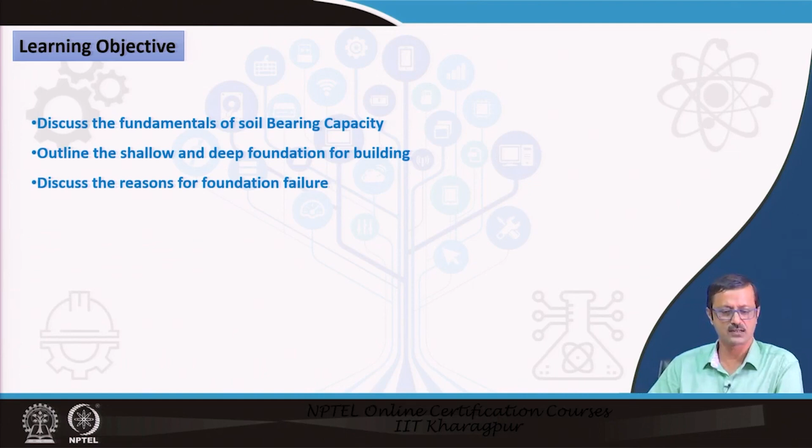So in that we will introduce the topic, and then we will discuss the soil bearing capacity, then the types of foundation - shallow foundation, deep foundation - and the reasons for foundation failure. The learning objective: we will discuss the fundamentals of soil bearing capacity, outline the shallow and deep foundation, and discuss foundation failure.

Actually it is a very vast topic, this particular foundations and soil mechanics, and it requires a rigorous kind of expertise to deal with. It is not only the structural engineers, geotechnical engineers actually deal with this. We will have to cover it in half an hour time, quickly, because we need to know some glimpse of it. It is a specialized field in civil engineering and building which deals with the building foundation.

And if you see the building foundation, it has two separate parts or areas of study. One is called soil mechanics and another one is called foundation engineering. Soil mechanics deals with the properties and parameters of the soil.

So if you take a soil, it is actually a three layered system you may say sometimes - it has some solid, it has some air, and it also has some water in it. A three phase system we usually call it. So based on the proportional amount of the solid, the air voids, and also the water, its properties change.

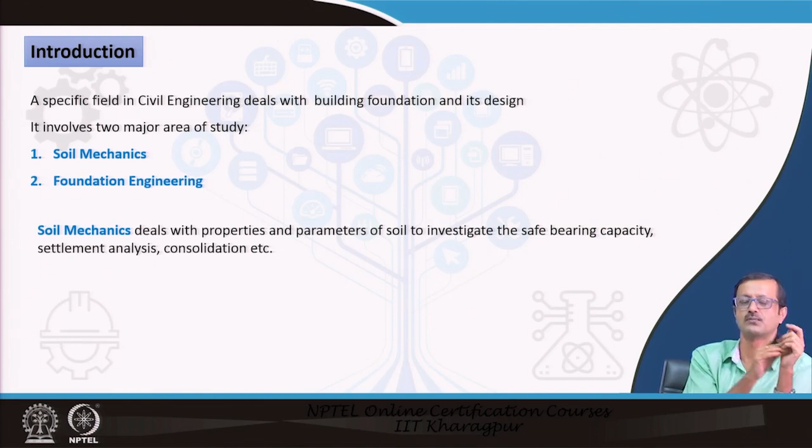So you require to investigate the soil to find out how much is the load carrying capacity, and how much the soil can further go for some kind of settlement if there is some load on it, or sometimes it is consolidated for a longer period of time, how much. So those are the typical outcomes which people want to know before they go for any kind of foundation system, and that is covered in soil mechanics.

And then comes the foundation engineering. Foundation engineering deals with the different types of foundation systems for the building and structure, their applicability, their construction, and the design mechanism.

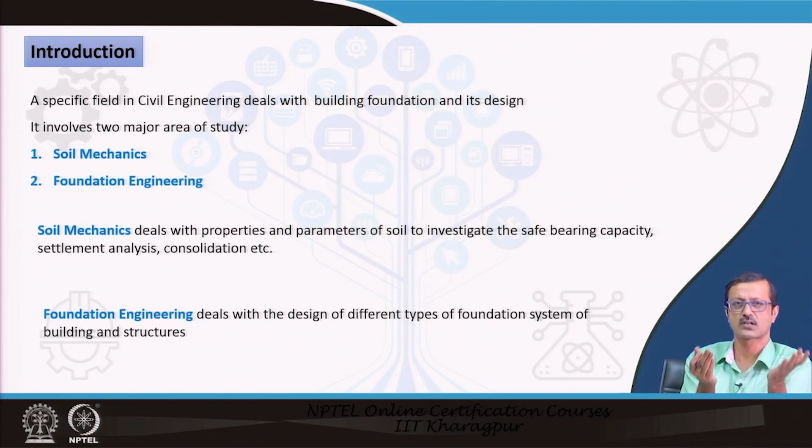So finally we boil down to the soil bearing capacity, whatever you taught in a particular soil mechanics. There are a lot of other things also, but mostly the primary target is to finally find out how much is the bearing capacity. And what is bearing capacity? The bearing capacity is the capacity of a particular soil to support any imposed load. How much it can maximum take has to be finally found out from those properties and parameters.

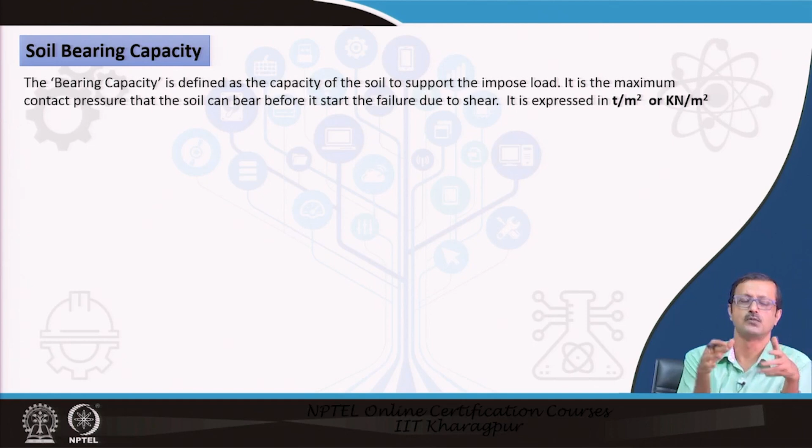And if you put more load - so I have some illustration. Suppose it is a soil and there is a foundation, and there are some column or some kind of wall, from where you can give some kind of load. So if there is imposed load, there will be some kind of contact pressure which will be opposite in direction - following Newton's third law, any action has equal and opposite reaction.

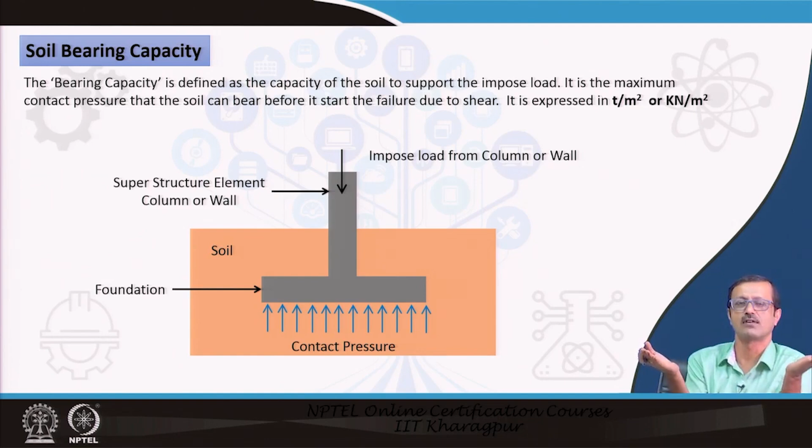So the contact pressure - now if you increase the load, suppose it is a very high amount of load, or you are not increasing the area of the foundation, the contact pressure will increase. And finally it will give you some kind of failure - shear failure, cracks will appear below the soil, and your foundation may settle down or maybe tilt, or those kinds of problems will be there.

We have to not load the soil till it fails due to shear. So you have to finally find out how much is the carrying capacity, either in ton per meter square or kilonewton per meter square. These two are the popular units for soil bearing capacity.

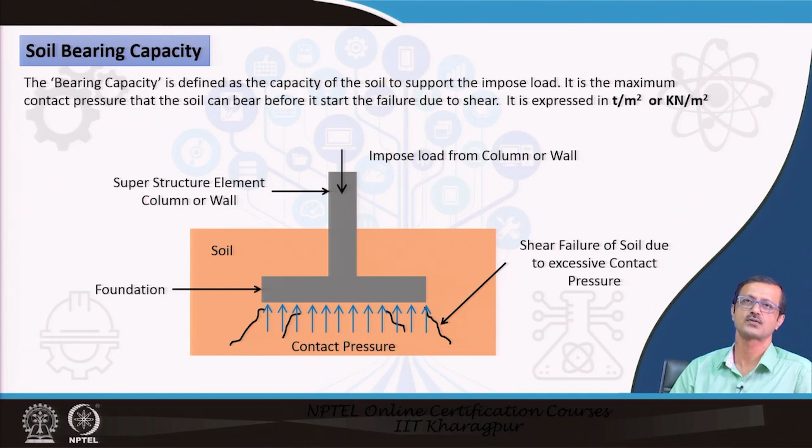So the geotechnical engineers do soil investigations for this purpose. There are a lot of ways - some laboratory tests, some in situ tests. They can do those and finally tell you that this much ton per meter square is the soil bearing capacity. So what are the factors that affect the bearing capacity?

If you see, the type of soil and its properties is one of the factors. There are basically two types of soil. One is called clay, the cohesive kind of soil, which has some kind of adhesion - one particle of clay and another particle of clay are attached with each other like a gum or glue. So it is adhesion.

Another type of soil is sand, which is non-cohesive, not having that kind of attachment or adhesivity, but having some friction with each other. If you want to move one particle of sand over another, you have to overcome that friction. Some soils have both varieties, called C-phi kind of soil, where C is the cohesion factor and phi is the angle of friction. These two properties have to be found out from testing, and from that you can predict the bearing capacity of the soil.

That is one of the important parameters of soil properties required to find the bearing capacity. Then the depth of water table at your site where the building is to be constructed - you need to know the depth of the water table, how much water can come and till how much. This is very important because sometimes it is saturated, sometimes oversaturated, sometimes fully dry. Because of that variation of moisture in the pores, the soil's bearing capacity character will change.

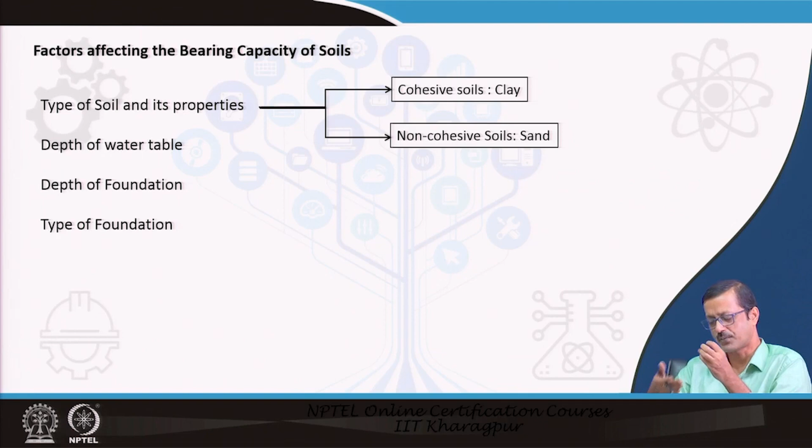You also require this understanding before you jump into bearing capacity: how much is the depth of your foundation. As the depth of foundation increases, you have to see at that particular depth how much is the capacity, not at any other point. Also you need to know the type of foundation - whether it is deep foundation or shallow foundation, or which type of foundation - that also has to be known to you.

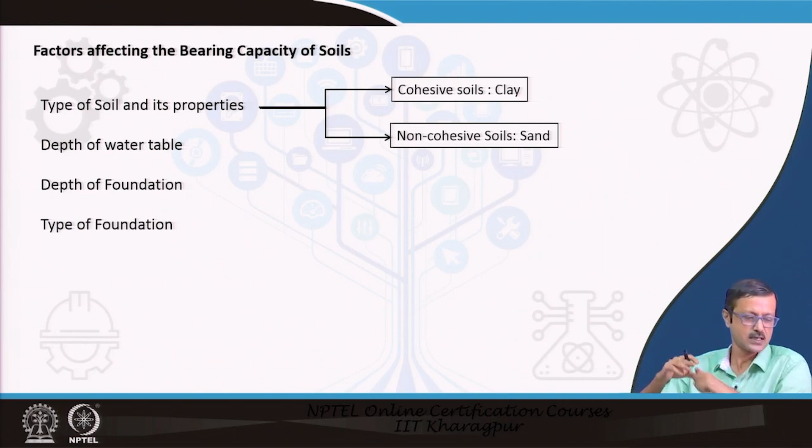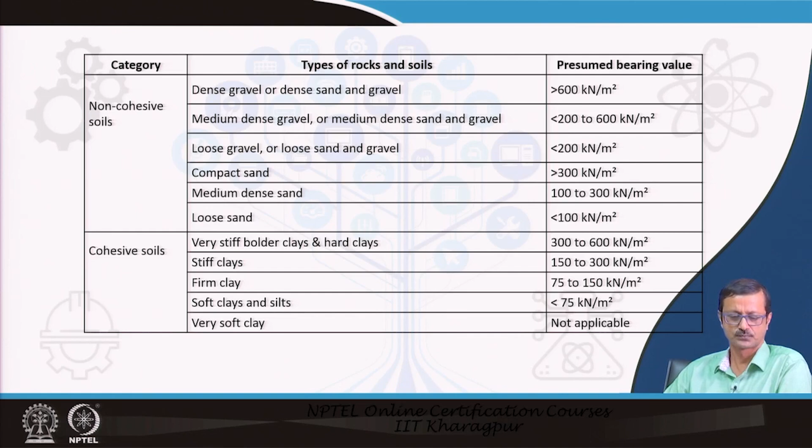So this is one table that gives you some idea about what should be the bearing capacity of the soil. Non-cohesive soil, that is sand or gravels, in the first part of this table, has a very good bearing capacity. But cohesive soil, which is clay, is gradually down - there are some soft clays marked as not applicable, where you have to improve or remove the soil, or use a different type of foundation like pile foundations for those kinds of soil.

Now, the type of foundation. We probably understand what bearing capacities are now, so let us see how the foundation can be designed. In foundation design, there are basically two types of foundation, or you can initially categorize two types: one is called shallow foundation and another is called deep foundation. These two foundations are classified based on the depth of the foundation and the width of the foundation. So if I draw a foundation, suppose this is the foundation, with this being the ground.

So this is the width of the foundation and this is the depth from the ground. This D and B will play a role. So if the D is less with the width of the foundation, then it is a shallow foundation, and if D is very high with respect to B, then it is a deep foundation. We call it a deep foundation.

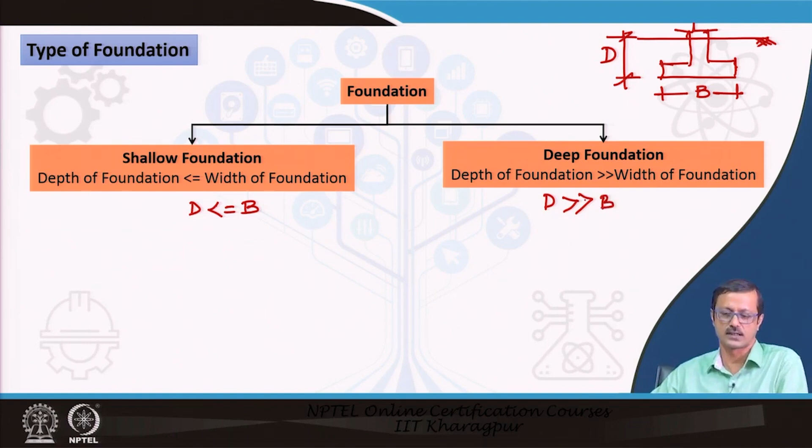So the shallow foundations are the wall footing, isolated column footing, or maybe the combined footing. There are various types of combined footings also, like rectangular footing, strap footing, grid footing, and raft foundations.

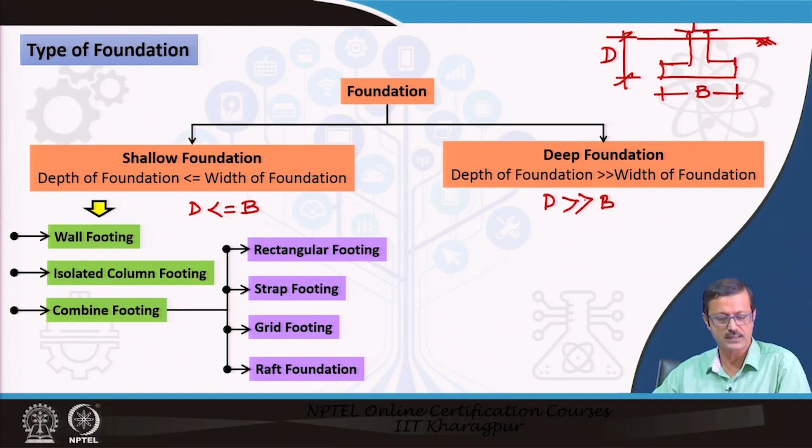So those we will discuss now, and the deep foundations are of 3 or 4 types, but this one is very important for our use, the pile foundation. Pile foundations are used mostly for buildings, and of course for bridges also they can use, but well foundations, pier foundations, are very much used not for buildings, but for other structures like railway bridges or any bridge in the water, in the river and all.

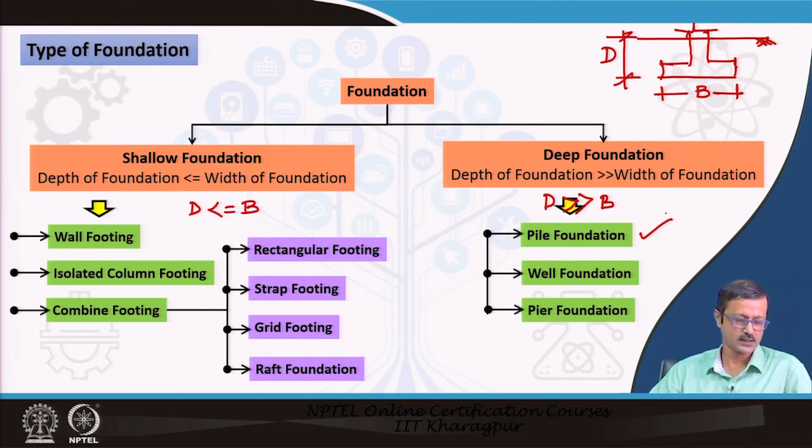Now in the shallow foundation, let us start with the isolated footing. Suppose there is a column which can take a load, and this load has to be taken to the foundation. So we are going to spread the legs of the foundation. It is something like your leg - the load of the whole human body is actually spread by the feet. So you need to increase the contact area such that it distributes the load in the soil within the zone of the soil bearing capacity.

So the single foundation is dedicated to a single column. If that is so, it is called an isolated foundation. It can be square or rectangular shaped, sometimes circular also. The area of the foundation should be such that the load is safely distributed over the soil.

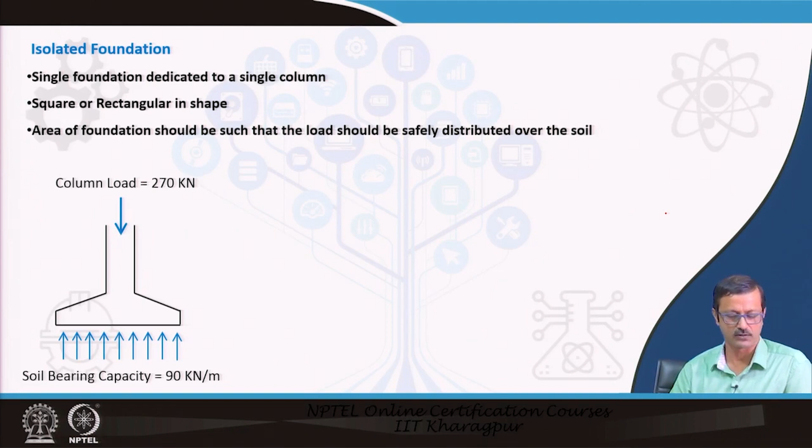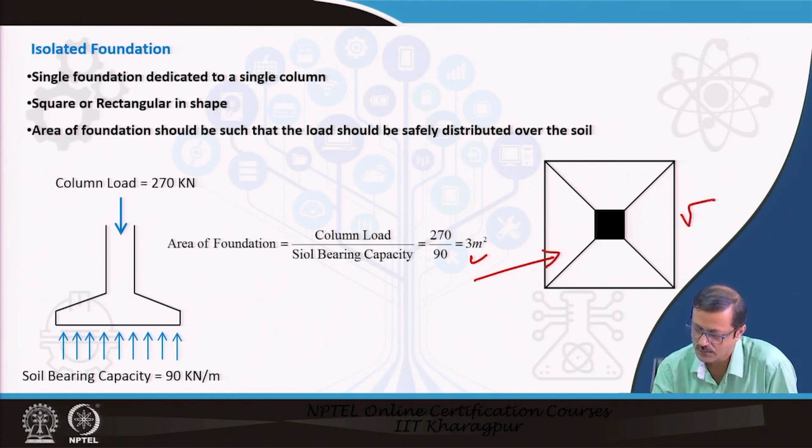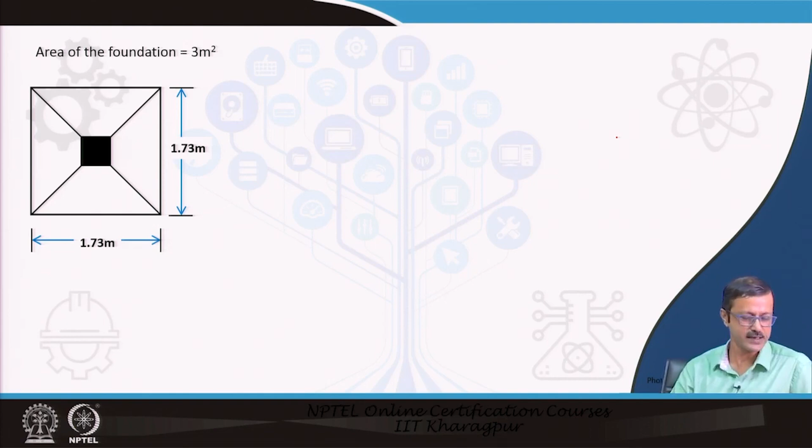Suppose I take an example where the column is taking 270 kilonewton load and the soil bearing capacity is 90 kilonewton per meter. So I can easily say that the area of the foundation should be the column load divided by the soil bearing capacity. So here it is 3 meter square. So this has to be 3 meter square, and if it is a square, it should be root 3 by root 3, something like that - so 1.73 meter by 1.73 meter on both sides.

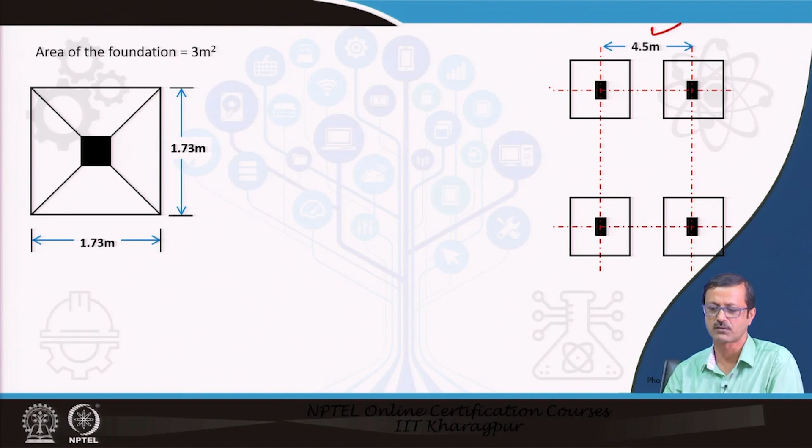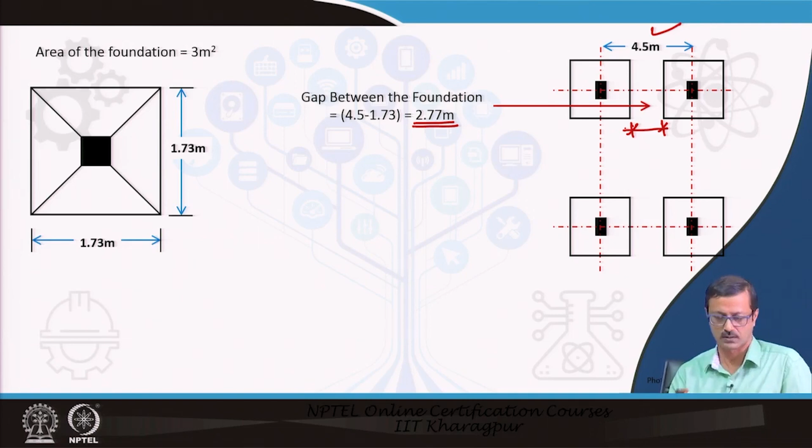Suppose you have a column layout in your building such that each column is taking 270 kilonewton and the distance between column to column is 4.5 meters. So you put your foundation of 1.73 meter by 1.73 meter, and you will find there is still a gap between these two, about 2.7 - so this is your 2.77 meter or so. So like that, our isolated foundation can work or be placed in a particular structure. So those are the isolated foundations, also called pad foundations sometimes.

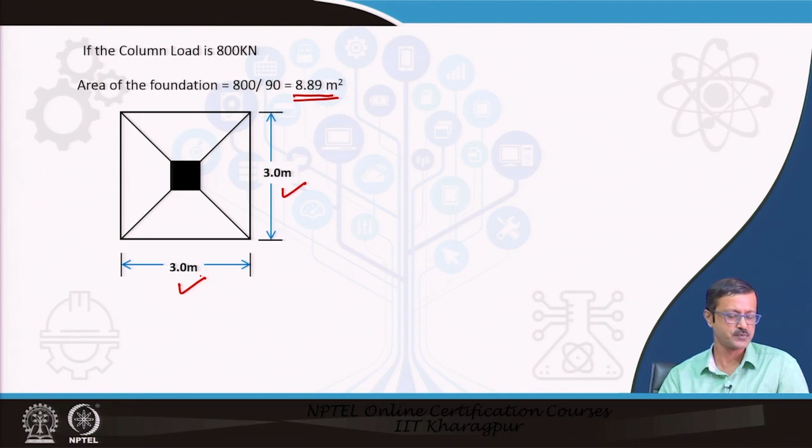Suppose I have increased the column load - instead of 270, now it is 800 kilonewton. So the foundation area now increases to almost 9 meter square. So I kept it 3 meter by 3 meter, which gives me a square isolated foundation of 9.

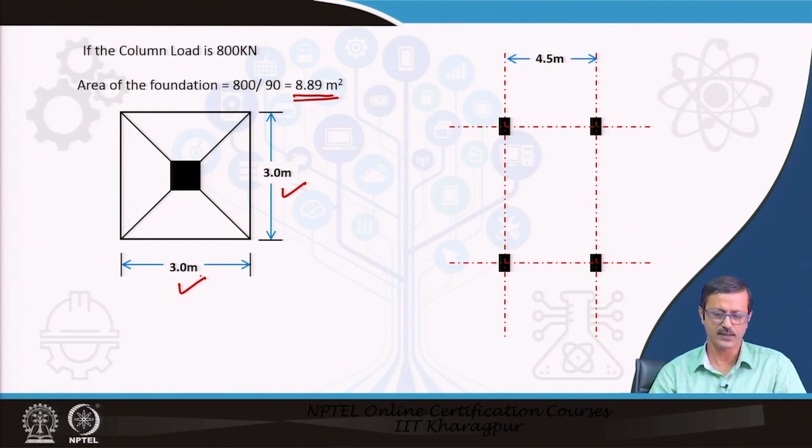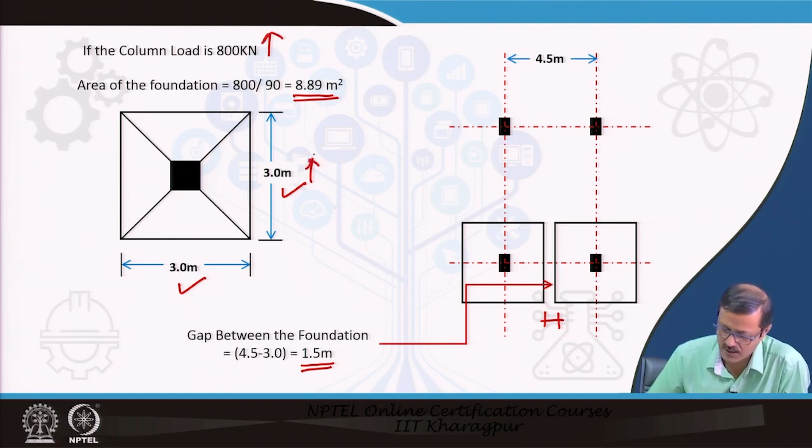Now if I have the same module with me, that is 4.5 by 4.5 is the grid size, so if I place this 3 meter foundation, the gap is now 1.5 meter. Sometimes it is furthermore close, because if the loading is much higher, this dimension also goes higher, so the gap becomes less. So if you further increase it, sometimes it may happen that the gaps become too narrow, or sometimes the foundations may even overlap.

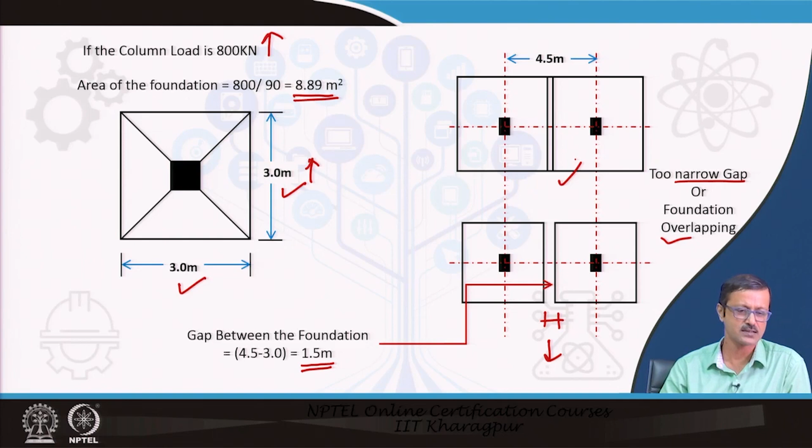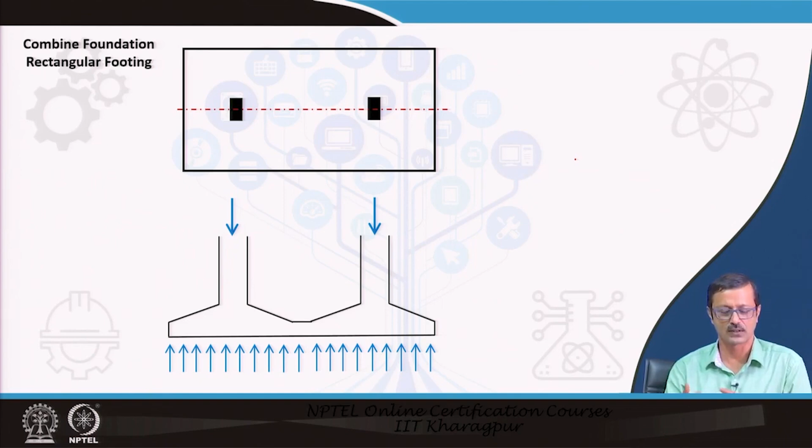This is an overlapping case, so the foundations may overlap. If both foundations overlap, we have to think of a common or combined foundation. So we can go for the combined foundation or rectangular footing, where both foundations are taken together and designed accordingly. So let us consider a small design example of this rectangular footing.

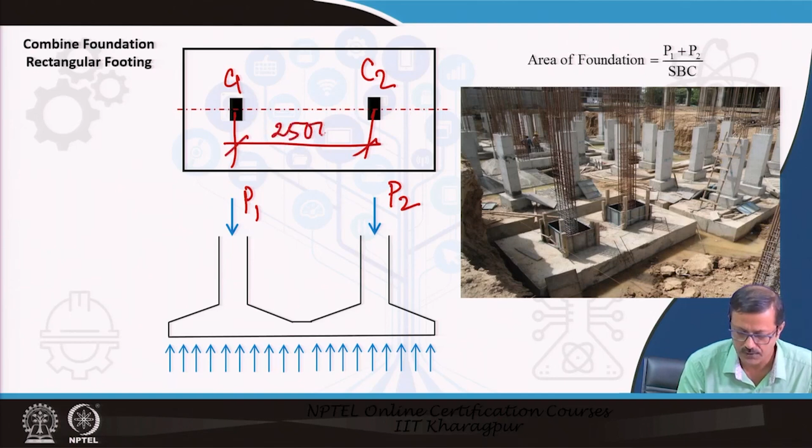Let us consider a case where the two loads are similar - it is very easy because you know it is exactly in the center. But if the two loads on columns C1 and C2 are different, say this is C1 with load P1 and this is C2 with load P2, then the loading is different. So I have kept C1 as 240 and C2 as 360 kilonewton. The distance between the columns is 2.5 meter, that is 2500 mm. The safe bearing capacity of the soil is 75 kilonewton per meter square.

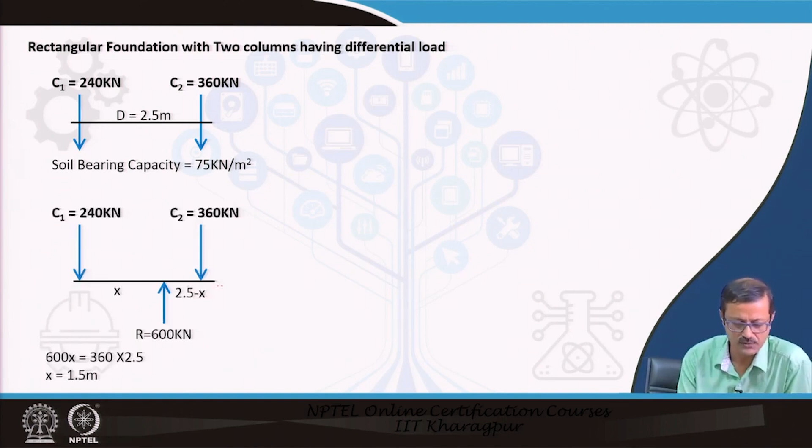Now, how can these two loads act on a particular foundation? This black line is the foundation. The equal and opposite reaction is 600, because 360 plus 240 is 600. This has to act at such a point which will not be exactly at the center of this 2.5 meter, because from the parallel forces point of view - if you remember the very first week's lecture - you can find the position of this 600 by taking moment at this particular point.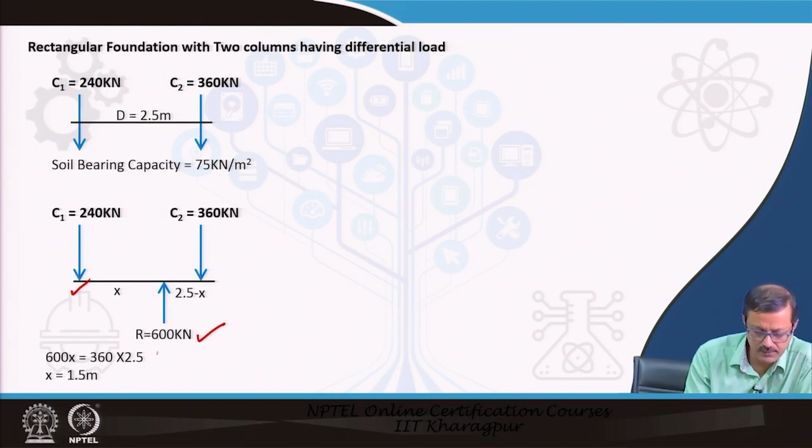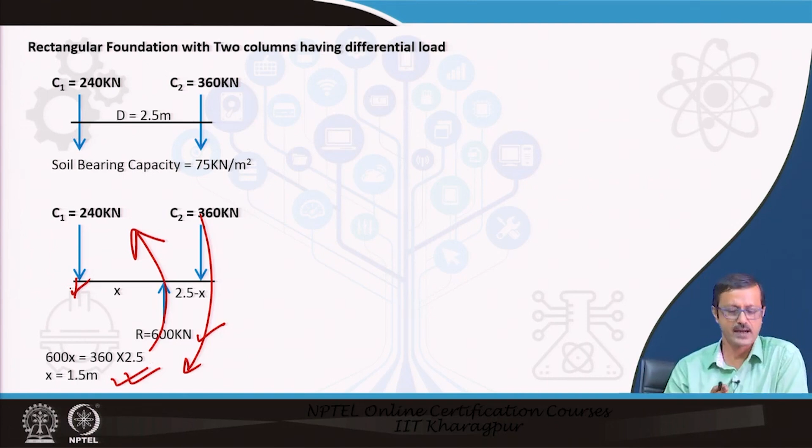I have taken the moment at this particular point. So 600 into x, which gives the moment, must be equal to 360 into 2.5, because the distance from here to here is 2.5. So I found that x is 1.5 meter. So 1.5 meter from C1, and 1 meter from C2, is where the reaction will go - that is the CG of the combined load.

Now let us find how much area of the foundation is required. That is easy, because the total load is 600, divided by the soil bearing capacity 75, which gives 8 meter square of area. Keeping L to B ratio as 2:1, where L is twice as large as the width, I can find that B is 2 meter and L is 4 meter.

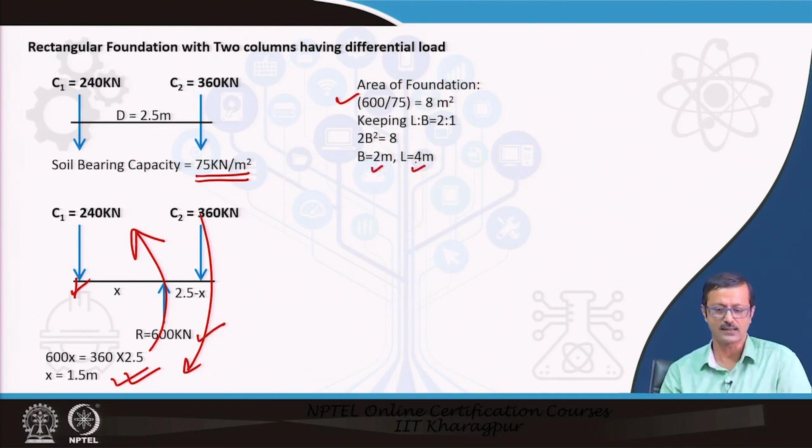From that I can now locate the footing such that the CG of the loading coincides with the CG of the footing - this is very important for locating this combined rectangular foundation. So the CG of the footing - this is 2 meter and 2 meter, since L equals 4 meter total - this is the CG of the footing.

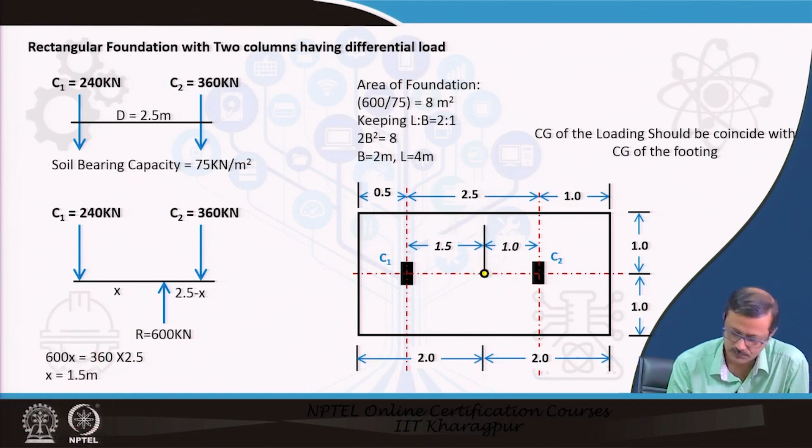This yellow point is the CG of the load, because this is 1.5 meter, which is your x, as I found out, and this is your 1 meter. So these two points have to be merged together, and if these two are merging together, then the rest of the dimensions can be adjusted accordingly. So C1 has to be at a distance of 0.5 meter from the edge, and C2 has to be at 1.0 meter from the edge. There will be some differential placing to maintain this criteria - that the CG of the loading should coincide with the CG of the footing.

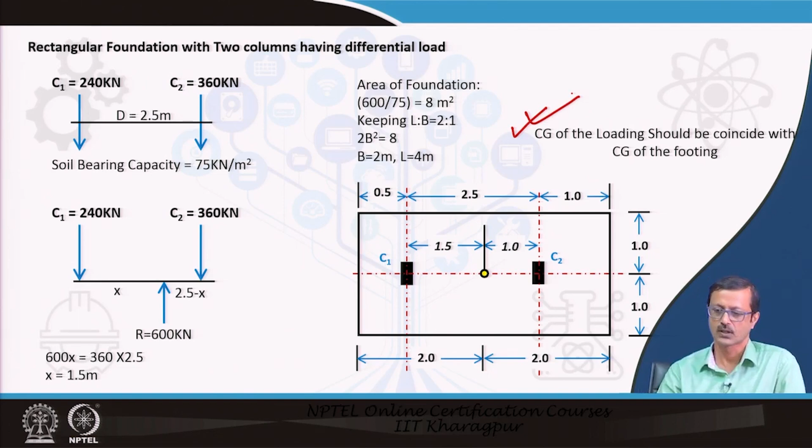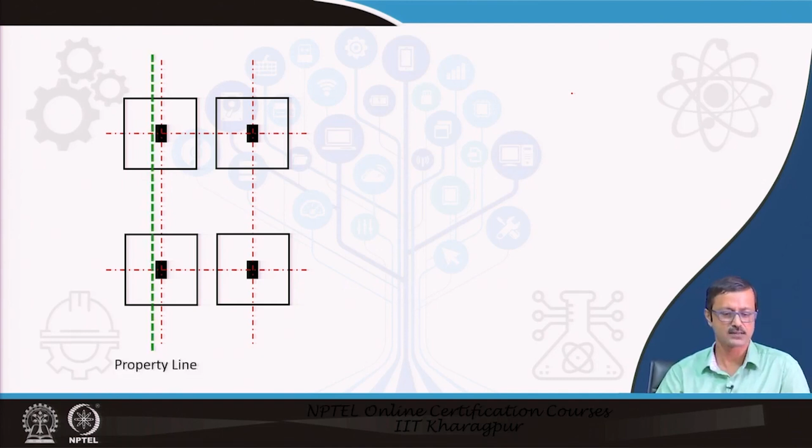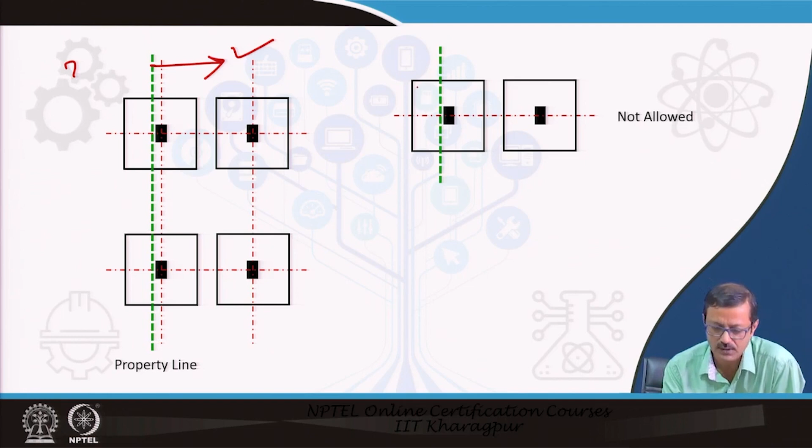Suppose this is the case where I have the foundation isolated footing and there is no problem, sufficient gaps also exist. But this is your property line, this is your property, this side is somebody else's. So you cannot actually go with excavating here, because this person will not allow you to excavate and put your foundation in that area.

So you are left with a kind of foundation here, and this strap beam has to be connected with the other one. Even though there is a sufficient gap, you still have to use a strap kind of thing, which is also called a cantilever footing.

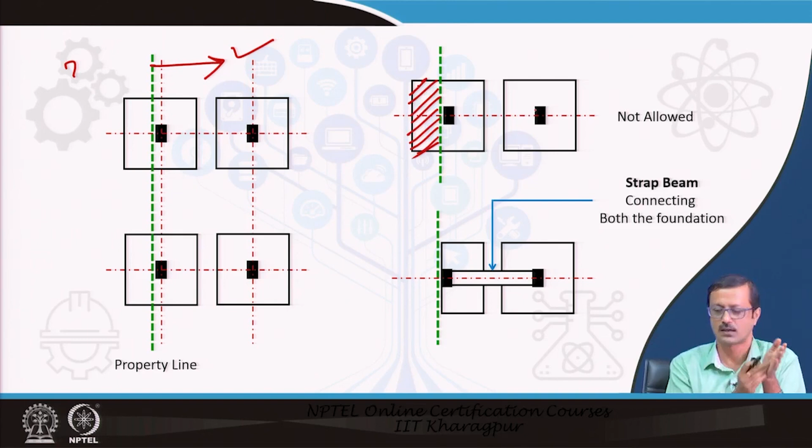Cantilever footing. This will be like a cantilever, connecting to that. Otherwise there will be a kind of differential movement. Why is this cantilever? Because if you see the section, this part is cantilever, and this part is okay. So you need a kind of strap - this is the strap beam.

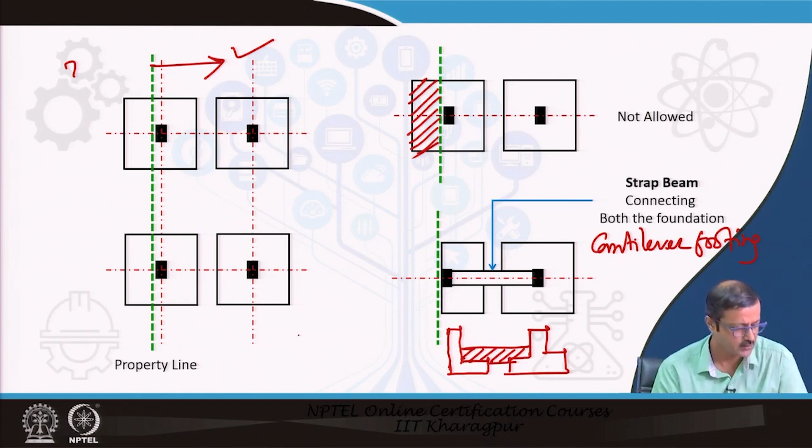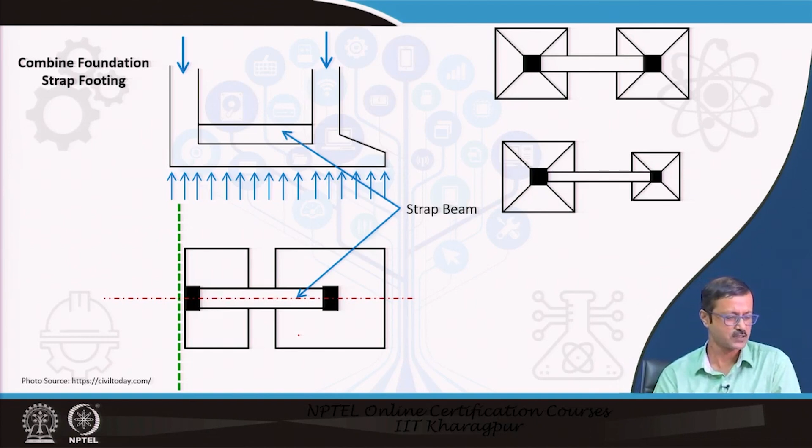This is at the edge - these two foundations are at the edge. So the combined foundation goes for the grid, so you have connectivity.

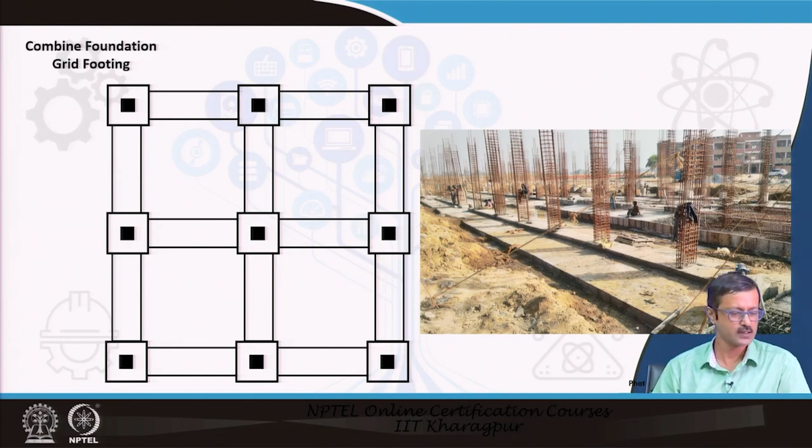Sometimes it is required because there are some kind of differential settlements also. So you can have a kind of grid, combined grid footing, and then finally we can go for some kind of raft footing or mat foundation, where the whole building is under a kind of mat. There are different types of raft floors that can be thought of.

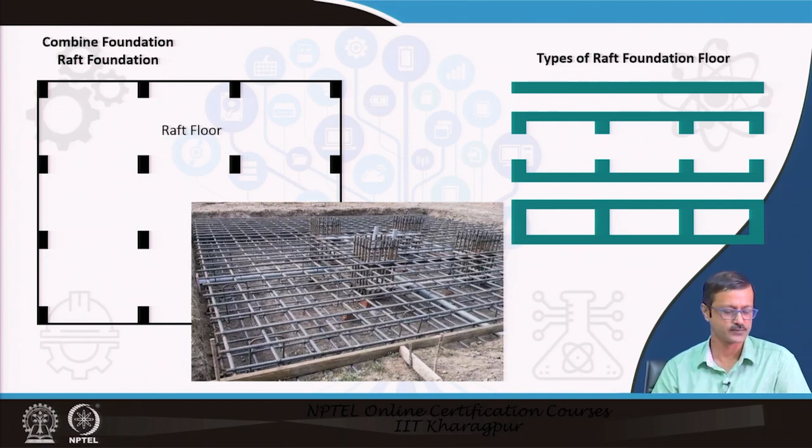Now let us go to the deep foundation. The pile is the common type of deep foundation. This has a thin cross section and is long in length, and it actually penetrates into the soil to transmit the load to a particular soil strata at the required depth. Pile foundations are also capable of providing stability against any kind of uplift.

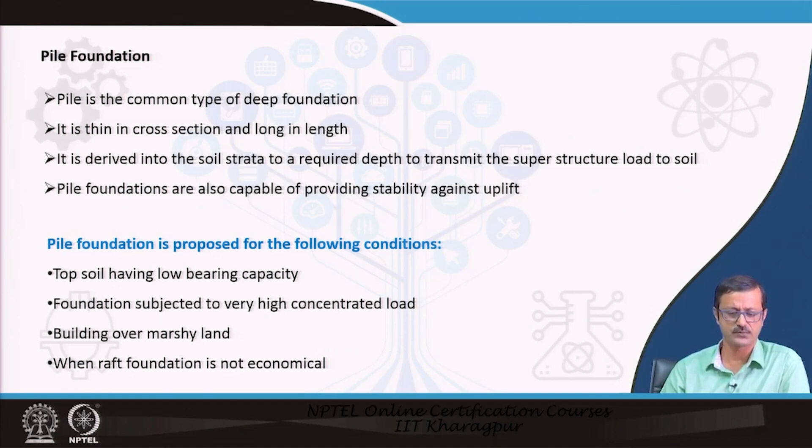So where can we propose the pile? First, when the top soil has very low bearing capacity, a very muddy kind of thing, and the foundation is subjected to a very high amount of concentrated load. If that much concentrated load needs to be discharged, you require a raft or those kinds of foundations - the fourth point I mentioned is when the raft foundation is not economical.

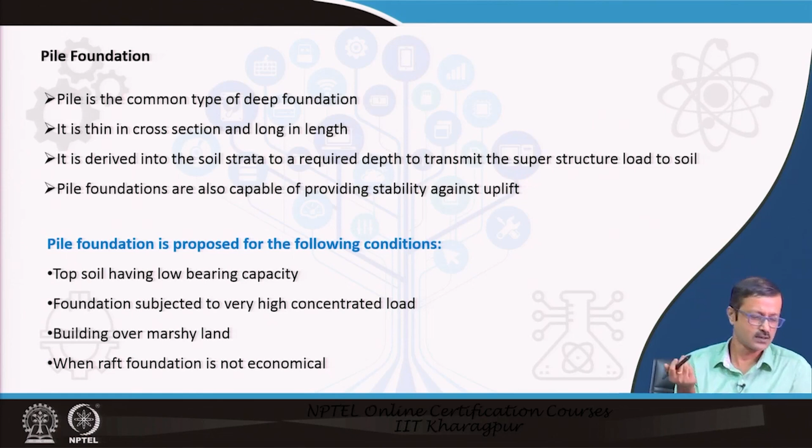So you may think of going with pile foundation for a building over marshy land where there is a waterlogged area. In that area you cannot rely on shallow foundation, because just beneath that particular shallow foundation depth, the bearing capacity is very poor.

There are different types of pile foundation, classified based on different requirements. The first is based on the load transmission point of view, and from that point of view it is classified as end bearing pile and friction pile. We will discuss what those are.

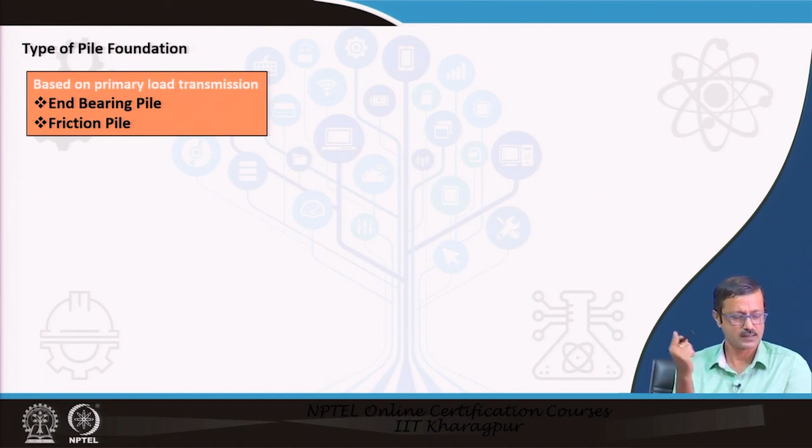Next is based on materials - we can have concrete pile, sand pile. Sand can sometimes be used, of course not for taking load, but for compaction and drainage, increasing the drainage and all. Then there are steel pile, timber pile, or sometimes composite pile.

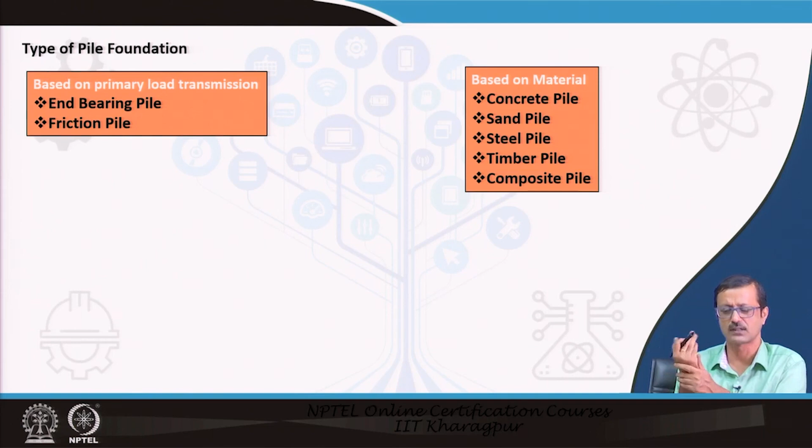Based on function, there is load bearing pile, which I just mentioned - that is friction pile and end bearing pile. There are sheet piles - the sheets can be steel sheets or timber sheets, also used as a pile to protect a particular foundation or underneath structure because of some kind of vibrations also.

We have a compaction pile which is used to improve the soil bearing capacity of a very loose soil area. We put the compaction piles and then start construction of other foundations.

There are also anchor piles, which protect your structure from uplift. Based on construction methods, there are two types: one is called precast pile, which as the name suggests is cast in the factory and transported to the site where you place it. The second one is cast in situ, which is cast at the site itself.

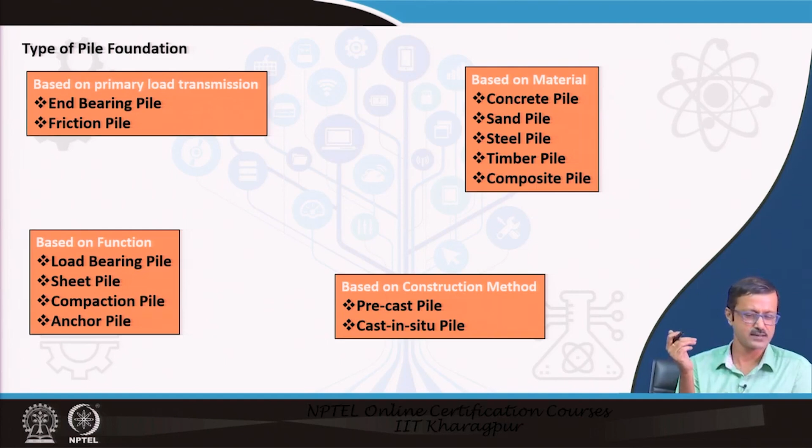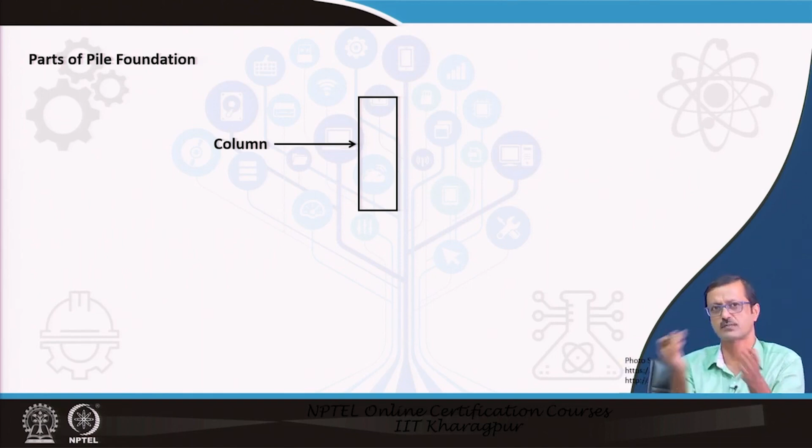Let us discuss some parts of the pile foundation. The column transmits the load to the pile or foundation, and the pile foundation transmits the load to the soil. So the column will transfer the load to the pile cap.

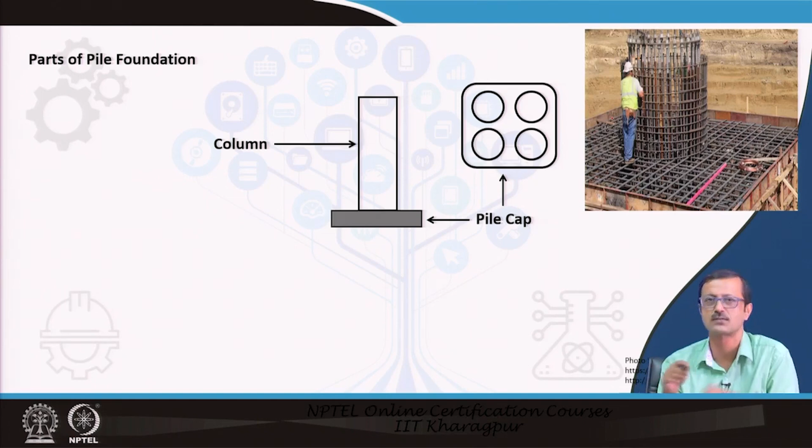In the photograph you see a huge column, maybe for a bridge or so, with a huge base which is the pile cap. The pile cap houses a number of piles, starting from 3, 4, 5 like that.

So these pile caps are there, with cylindrical long portions which penetrate the ground to a certain depth and transmit the load. This is called a group of piles. It cannot be one single pile with one single column.

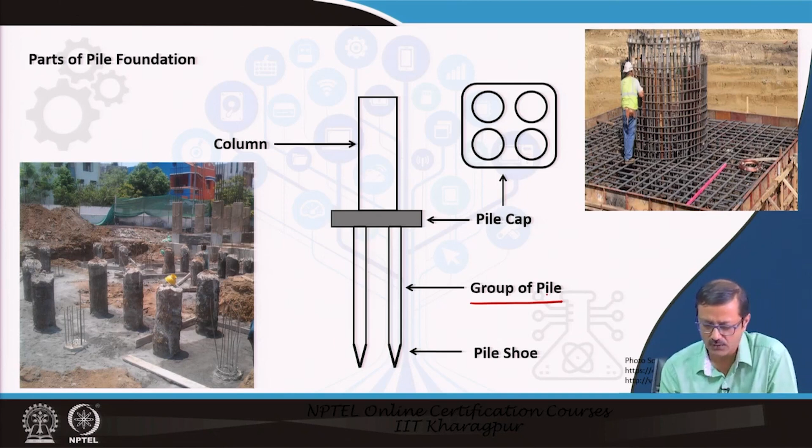It may be a minimum of 3 piles or maximum any number that can be accommodated in a particular area. Finally it ends with a pile shoe, the end portion of the pile, which is a kind of sharp edge.

So the classification based on load carrying capacity of the pile: the end bearing pile transmits the load finally at the end. It's something like if you take a glass of water and want to place a pile, a stick, or a pencil in it.

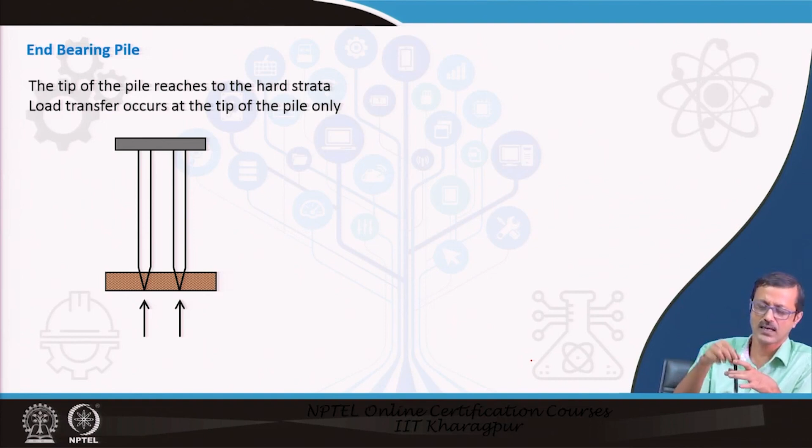The water cannot take the load, so you have to rely on the tip of the glass, the hard base. You transfer the load through the pencil to the tip of the glass. That is the end bearing pile.

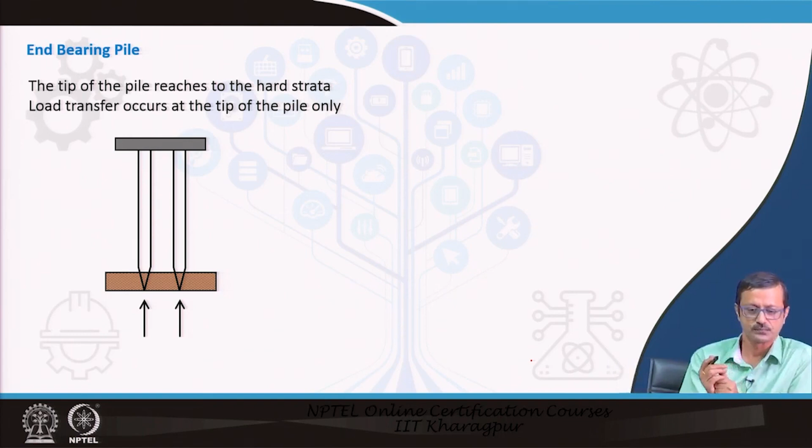Another type is called the friction pile, where friction is generated between the pile surface and the soil. Suppose that glass of water is now replaced by sand.

Now if you put a pencil in, maybe you put it halfway into the glass, not reaching the tip, and that pencil can still stand and transmit the load. How is this possible? Because as load comes, friction is generated between the sand particles and the surface of the pencil, and that transfers the load.

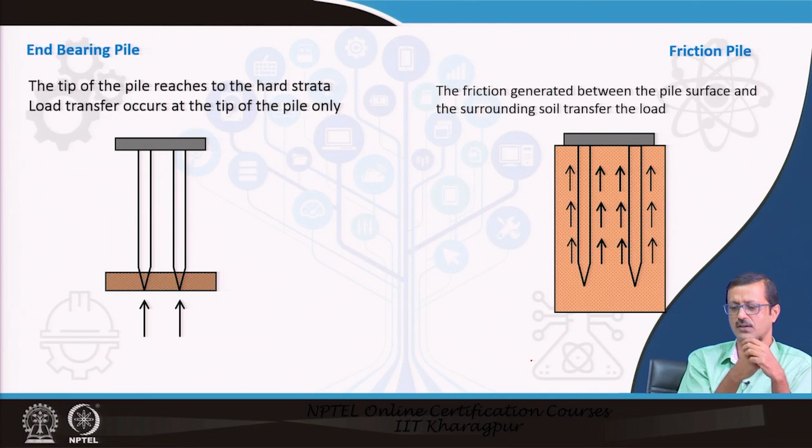So that way you may not reach the final hard rock strata. If your soil is good enough, a sandy kind of soil, it can transfer the load by virtue of the skin friction. That is called skin friction.

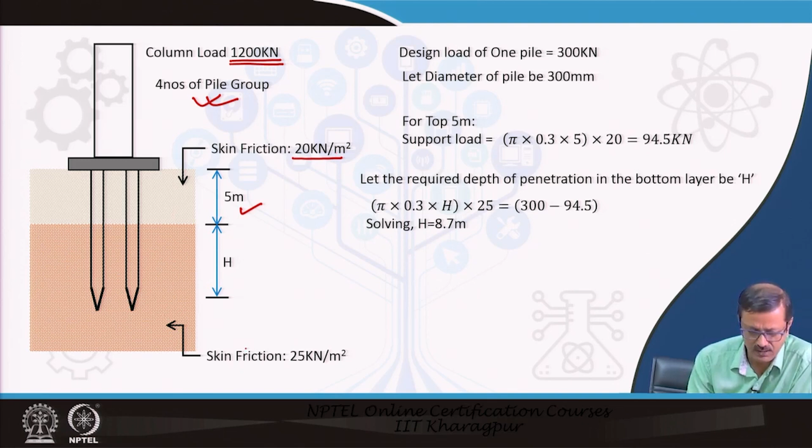Now let us see how to derive a small mathematical problem. I have a column load of 1200 kilonewton, and a 4 pile group, with a known soil strata. The top 5 meters of soil has skin friction of 20 kilonewton per meter square, and below that another good soil layer with 25, which is a little better.

I have to find out how much will be the penetration depth in the second layer. Design load of one pile is 300 kilonewton, since there are 4 piles, so one pile takes 300 and the total takes care of the 1200 load. Let the diameter of the pile be 300 mm, as I have assumed.

For the top 5 meter, this is the supporting load, because this is the surface area of the pile at a depth of 5 meter. I used this formula: pi d is the perimeter, into L is the curved surface area of the cylinder. So pi d L, with d in meter and L equal to 5, into 20, which is the skin friction. So I got 94.5 kilonewton that can be transmitted by skin friction in the first 5 meter depth of soil for this 300 mm pile.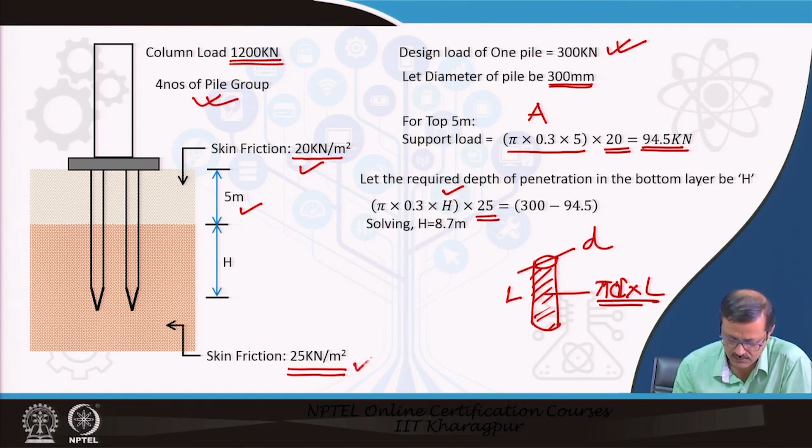Now for the next length I have to find h. I again found the perimeter and length, multiplied by 25, because the second layer is 25 kilonewton per meter square. The remaining load to support is 300, and 94 is already supported by the top layer, so this is the remaining load. Solving this equation, I found the height of penetration in the second layer is 8.7 meter. So you need almost 13 to 14 meter length of pile to support the 4 piles supporting the column.

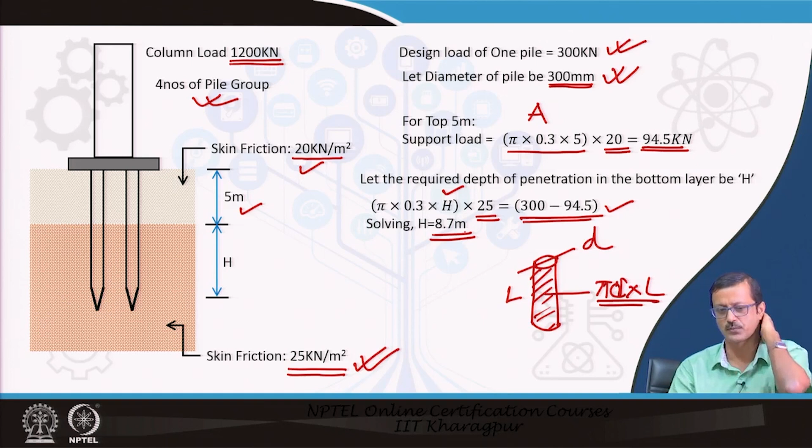So finally, I want to discuss some important reasons for foundation failure. The reasons for foundation failures are unequal settlement and the presence of expansive soil.

Expansive soil, suppose in the dry time or summer time, shrinks and its volume is very less, and then during monsoon, because of the presence of water, it expands. So it has no capacity at all from the bearing capacity point of view. That is one of the reasons for failure.

Rising of the water table also moistens the soil, and that requires some kind of treatment, or you need to know what the actual bearing capacity will be with a high water table. Foundation damage by tree roots, foundation damage by rat holes are also issues, and soil liquefaction due to earthquake is another reason for foundation failure.

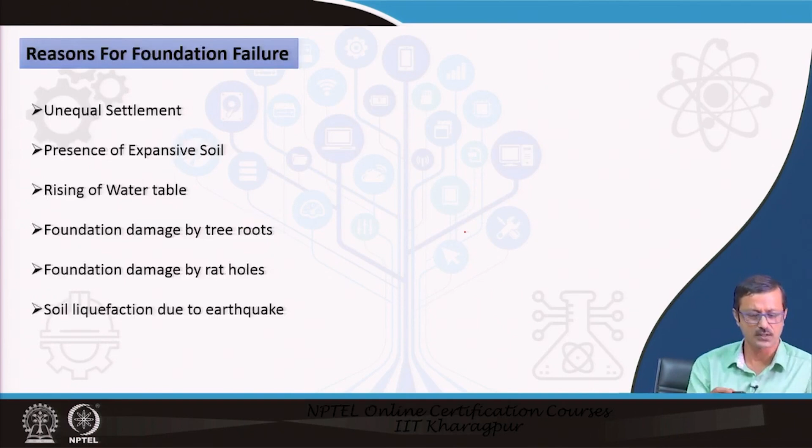Settlement is one of the major issues, and there are 3 types of settlement that let me discuss quickly before we come to the end.

The first one is uniform settlement, where the whole building settles uniformly. Since all parts settle uniformly, it does not create any problem, no crack will develop, but your plinth level decreases or your height changes, or you may have other problems like water coming into the building after certain settlement.

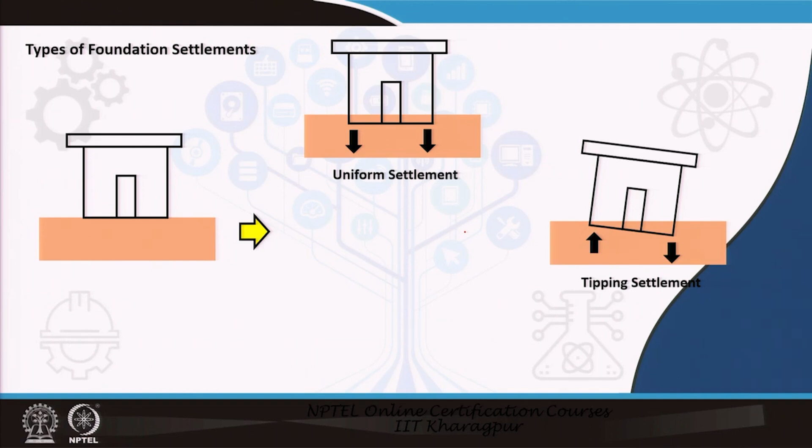The second is called tipping settlement, where the building stays intact, but one side is under uplift and the other side under push-in. Sometimes in initial stages no crack develops, but finally, if it is not smooth, some kind of crack may develop.

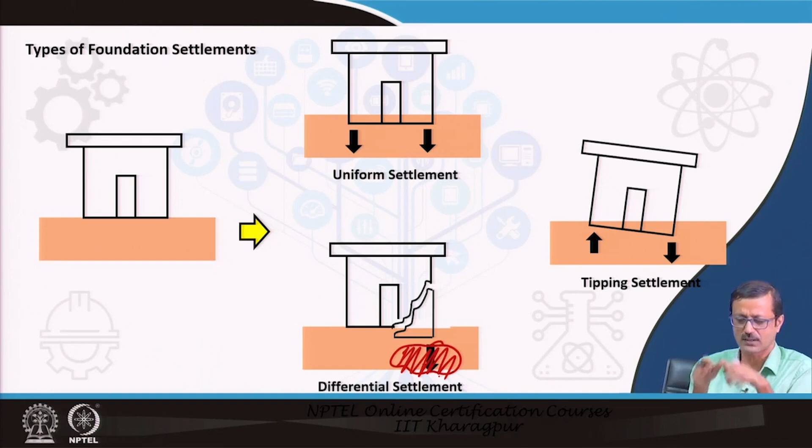But the third one is very dangerous, called differential settlement. That means only one part tries to settle, because there is some problem in the soil, such as expansive soil or low bearing capacity soil that was not tested properly, and because of rising moisture, there may be a problem and differential settlement occurs, and in that case some kind of crack will develop.

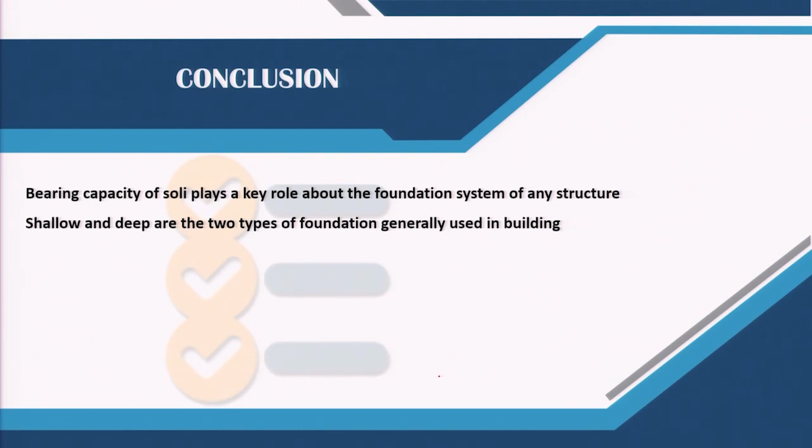So that is all for today's lecture on building foundation. What we understand from here is that the bearing capacity of soil plays a key role in foundation system design, and shallow and deep foundations are the two types generally used for buildings. This is the 37th lecture. Next lecture we will go to high rise buildings in structural systems. Thank you very much.